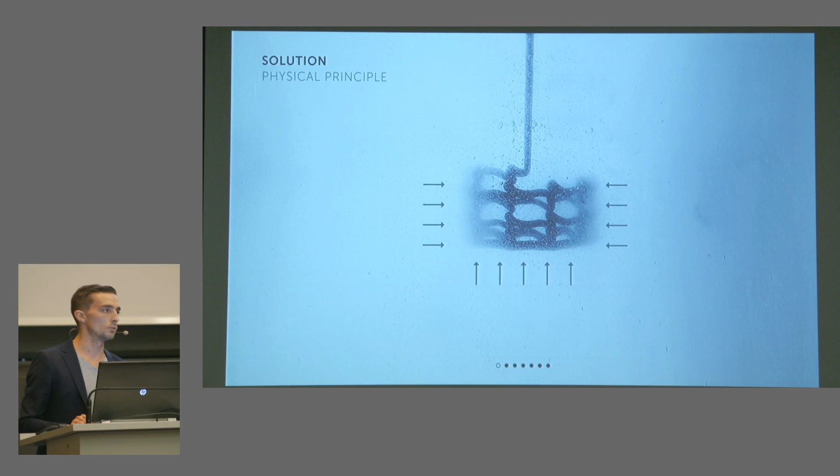Soliquid is a French startup founded in 2018, based in Paris, France. Both founders are architects, Jim Ronet and myself. What we are proposing is large-scale 3D printing in suspension for concrete and resin. The physical principle we use is the viscosity of the gel matrix, which keeps the material in place until its total solidification. Depending on the material, you need to wait longer or not. For resin, you need to wait 20 minutes to dry; for concrete, we wait 24 hours.

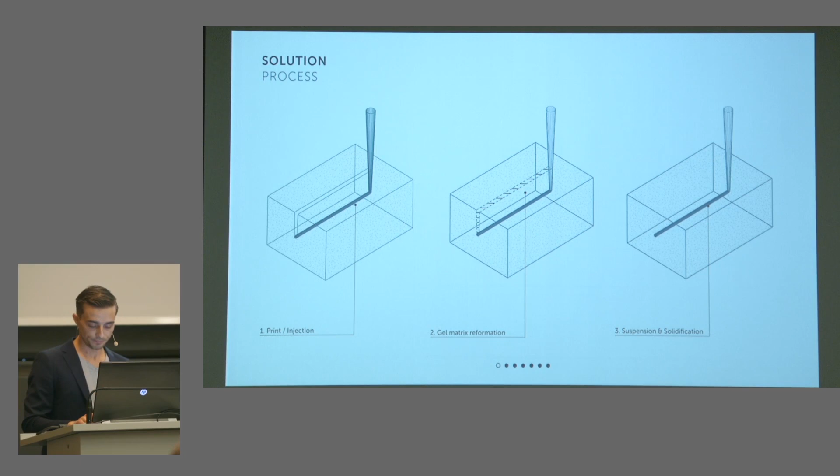So how it works: there is an extruder going through the gel. There is a gel reformation, and after extrusion it stays in place until solidification. This allows us to create very complex geometry because we are not using a layer-by-layer methodology. Also, we don't need any support, and we can reuse the gel for months, which allows us to save material because we only put material exactly where we need it.

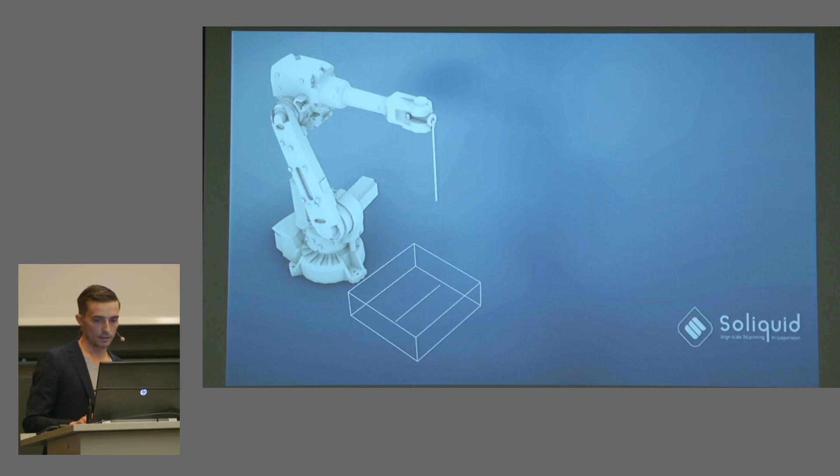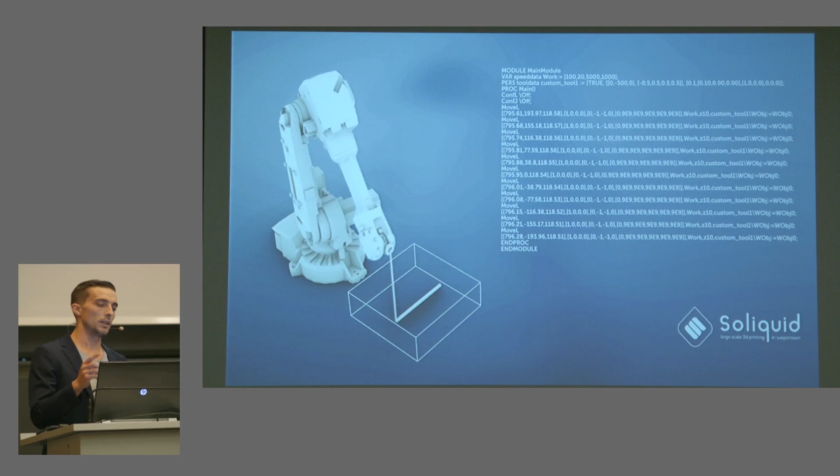So basically, this is how it works. We just draw a line in 3D space, divide this line by successive planes, translate it into a RAPID code, and then we can print it. This one is a simple line, and this is real time.

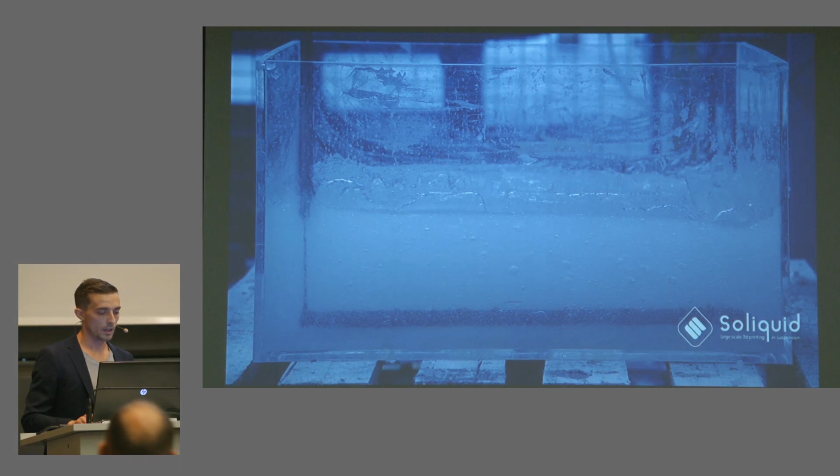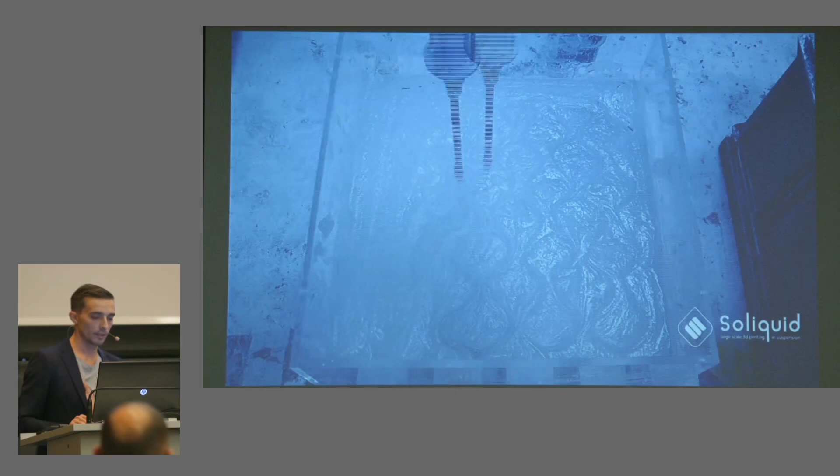After this proof of concept was done, we tried to print more complex geometry in the 3D space. Afterward, we just need to extract the pieces. At this time it was by hand, but now we are using a bigger tool.

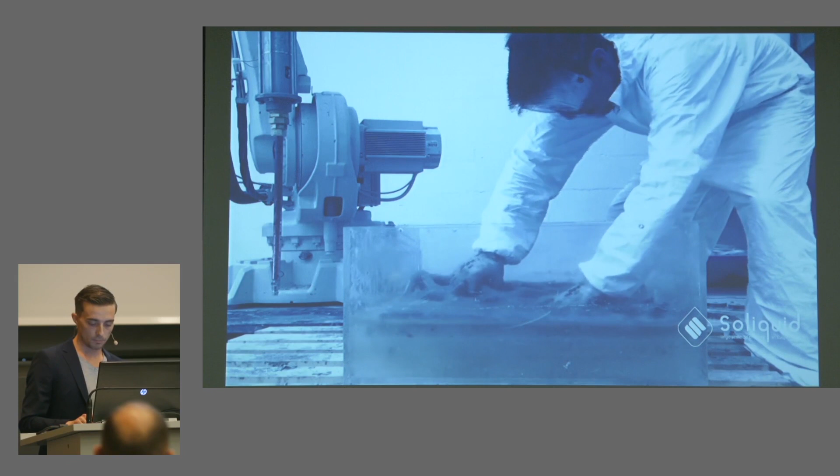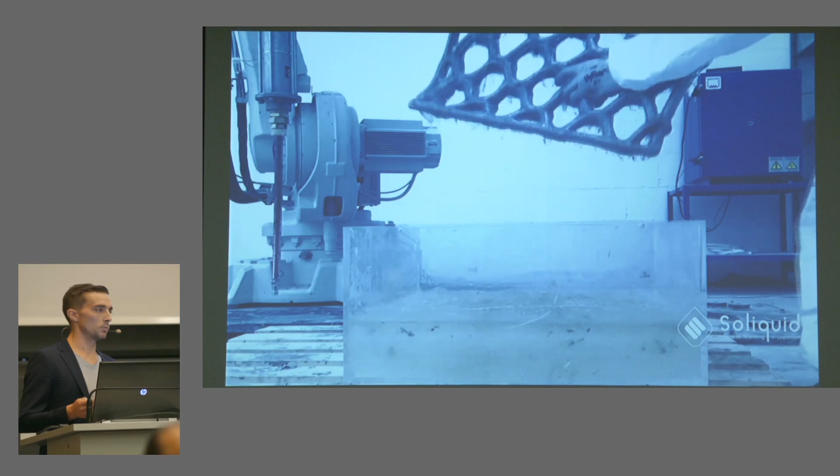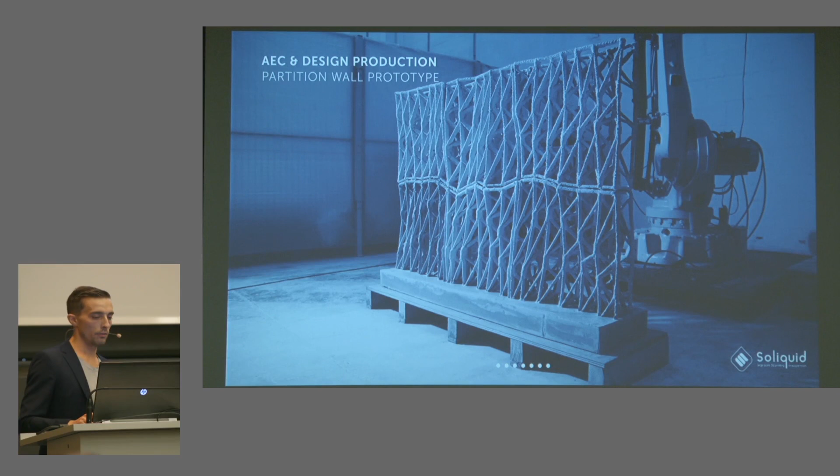So this was the end of the proof of concept. Because we were struggling to find the right gel with the right viscosity for the concrete, our first large-scale prototype was this wall composed of 6 modules. It's a very intricate geometry.

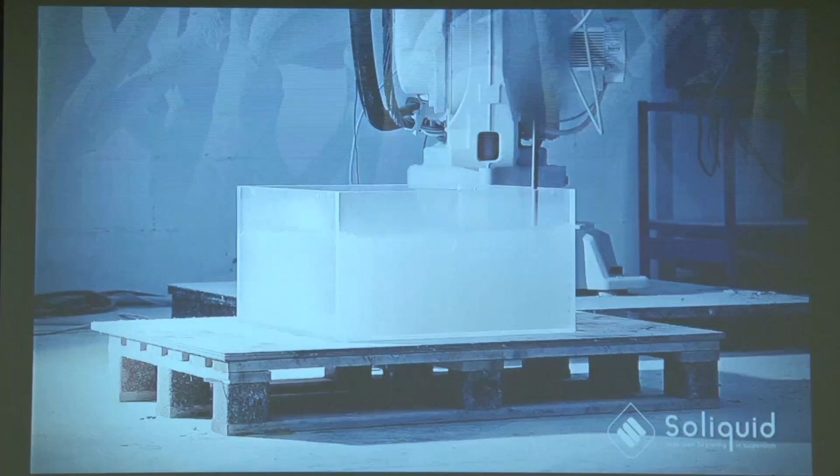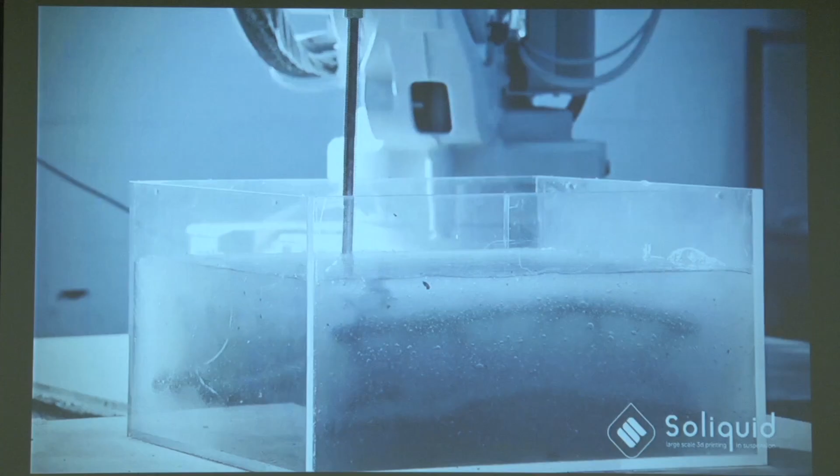This is a little video showing it while printing. As you see, the material keeps in place. This is real-time printing, and then you get your pieces.

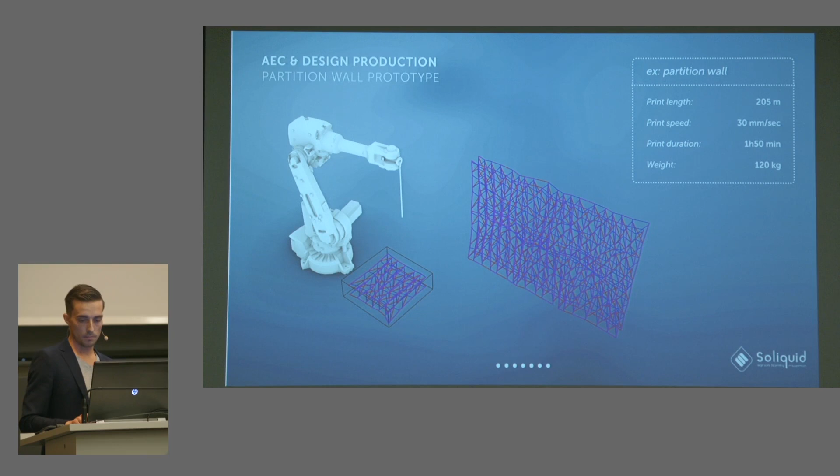This wall was 1.5 meters wide and 1 meter high. We printed all those modules flat in the tank of gel, and afterward we just assembled them together with sealing resin. The biggest problem with this wall was it was not solid at all and very fragile.

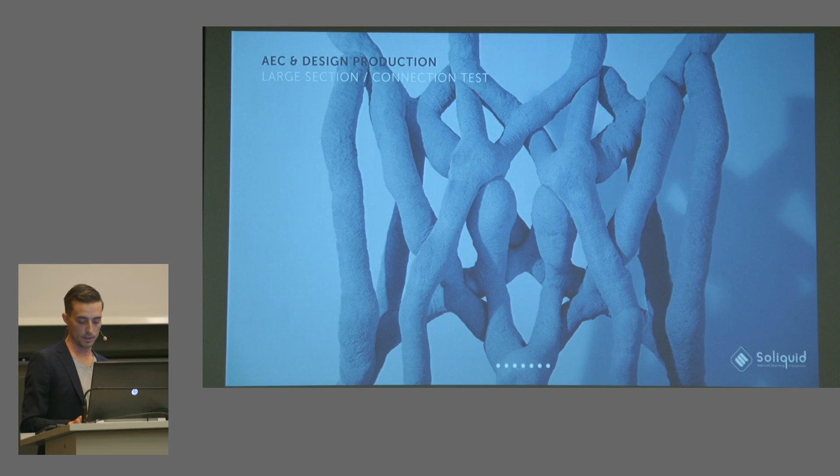That's why we tried to print a bigger section. For this prototype, it was a 5 centimeter section. We made this geometry to test all the types of joints and how they could be connected, and also to see how close the 3D print is to the finished model.

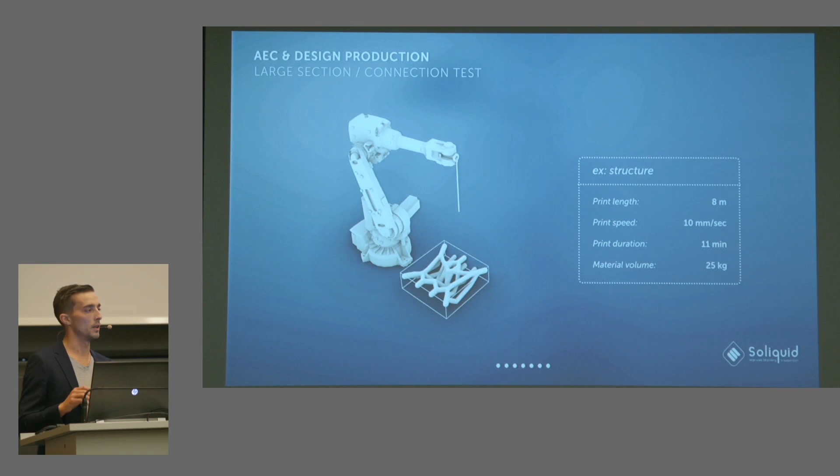This one also we printed flat, so a little bit of data: it was a printing length of 8 meters, it took 11 minutes to print, and we left it for 12 hours inside the gel before extracting it.

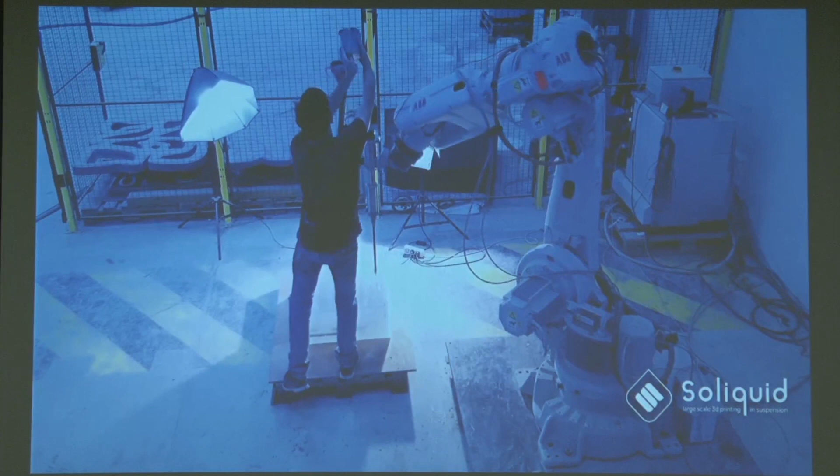The biggest problem is that if we would like to make bigger structures, we get a problem with how we feed the extruder. This one was a small one, so we ended up with this setup.

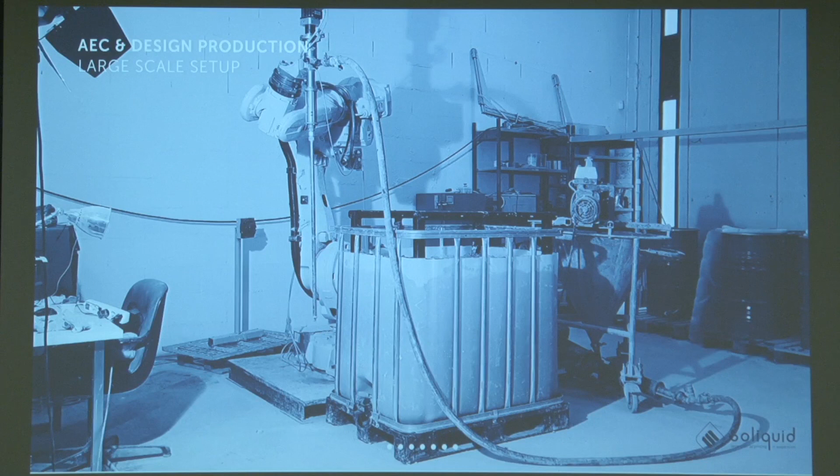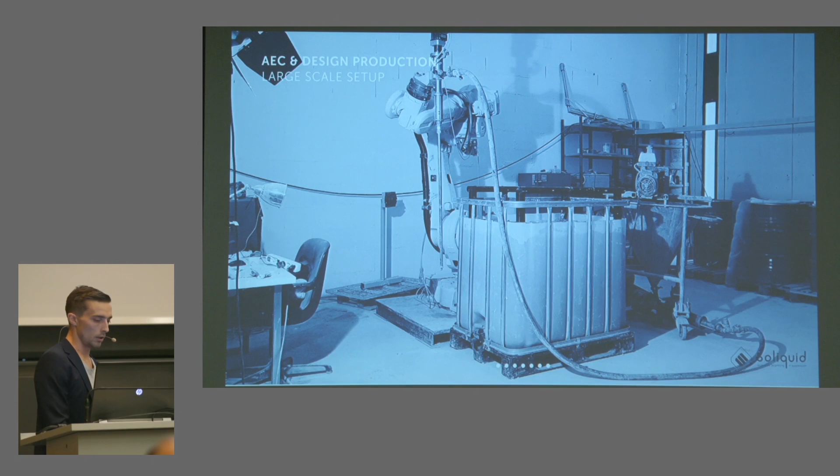Now we are printing inside a 1,000 liter gel tank. There is an extractor at the bottom of the tank that goes down to up to extract the pieces, and a bigger pump to be able to extrude a few hundred kilos of concrete.

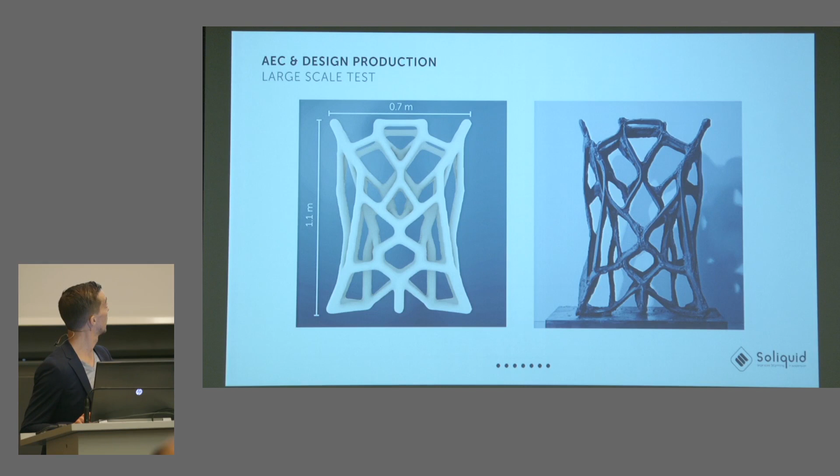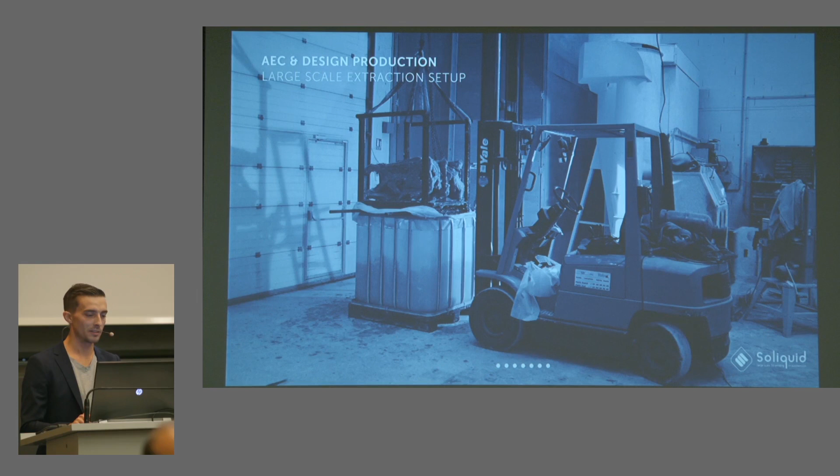This was our first large-scale prototype. It was 1.1 meters high and 70 centimeters wide. It took us 22 minutes to print, and the weight was 80 kilos. We had to extract it from the gel tank with a bigger tool because it was too heavy to do by hand.

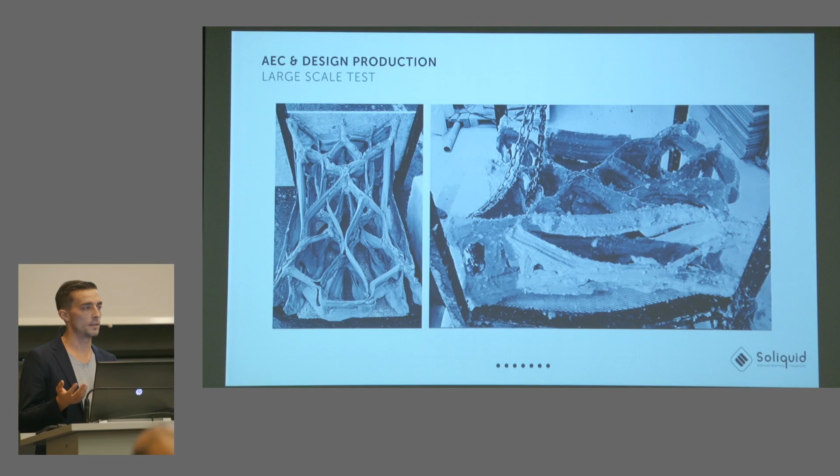Unfortunately, the first test was not very conclusive because the finish was not good. Because, of course, when we scale it up, we just face more problems like gel pressure and difference of viscosity between the concrete and the gel, because we had to make a very viscous gel to hold 80 kilograms of concrete.

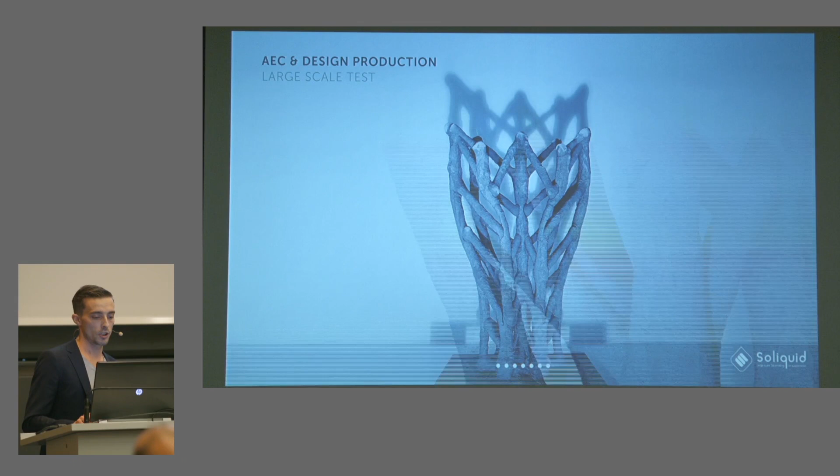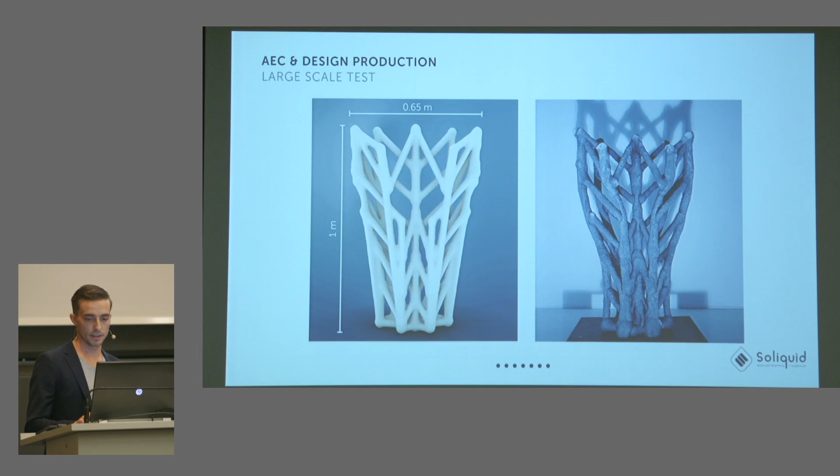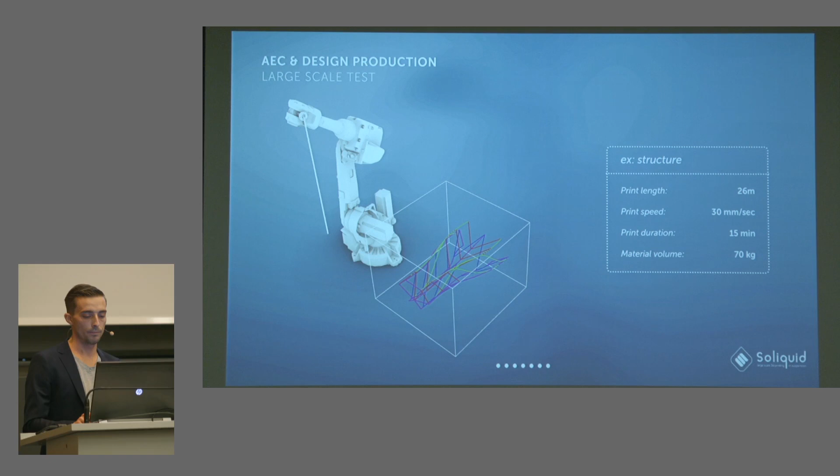So we worked a little bit and ended up with this prototype, where the sections were much cleaner, and the finish was closer to what we actually designed. This one also was printed flat. It took us 15 minutes to print, and the weight was 70 kilos.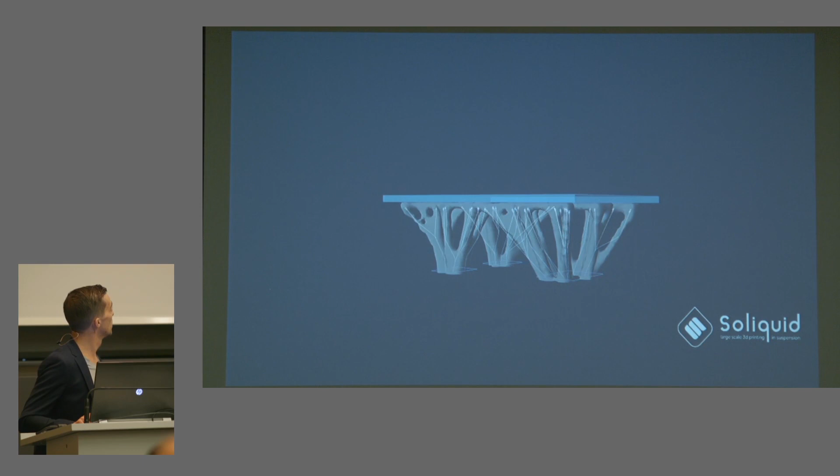After we made this project, we tried to link topology optimization to it. We developed a multi-agent algorithm able to create the path for the robots, and then the robot just follows this path until it's making the full structure.

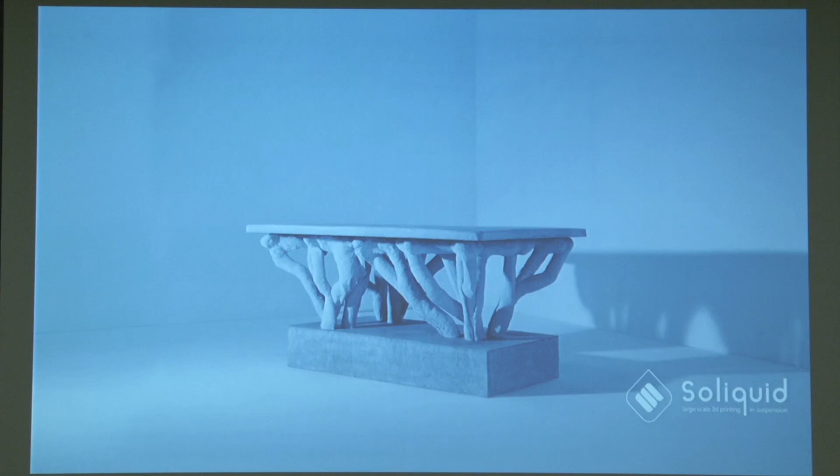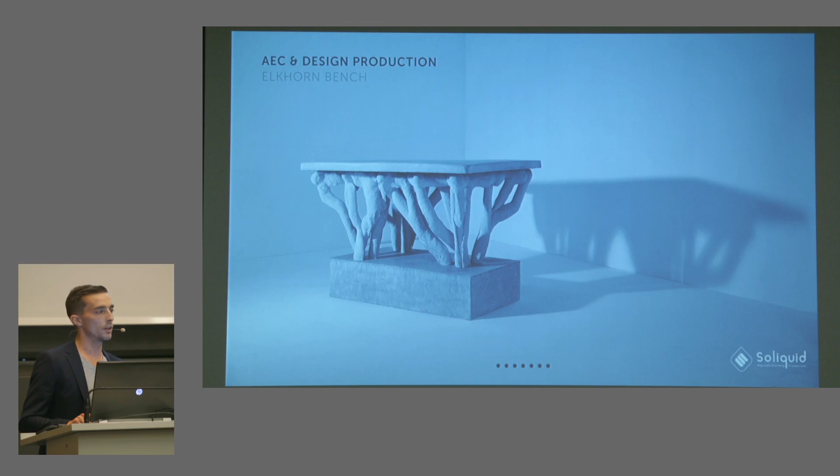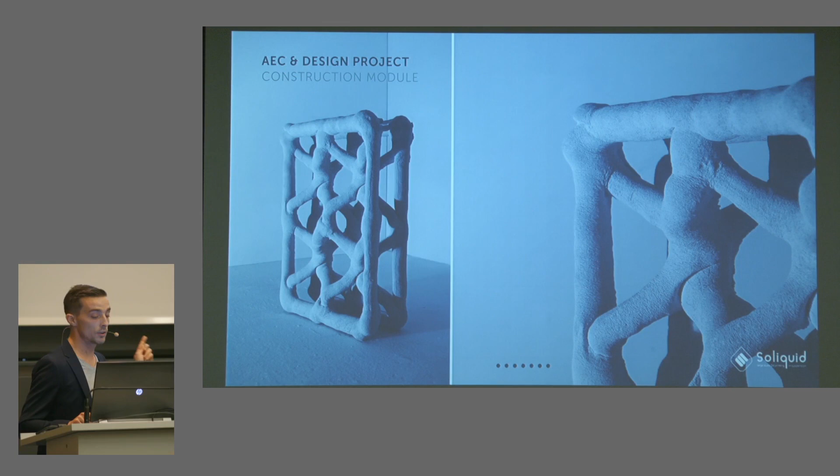For example, the plate on the top of these structures was 50 kilos, and we just sat on it, and it didn't move at all, so it's pretty solid. And the last thing we made was a quality finish prototype. This is now the best finishing we've succeeded to get.

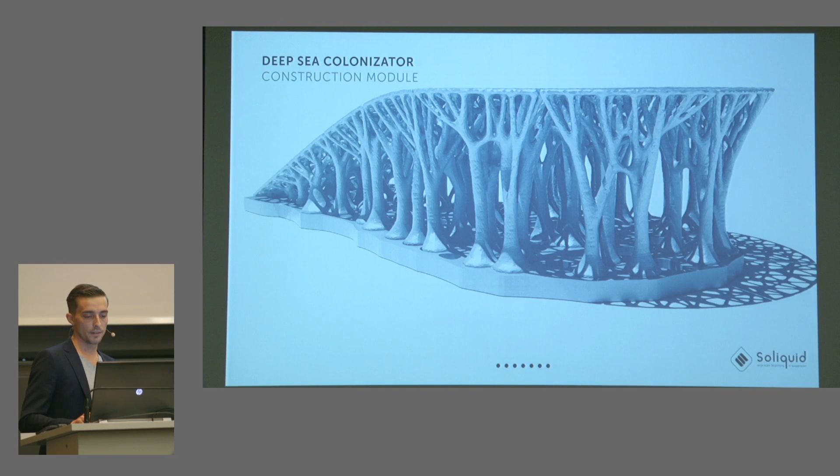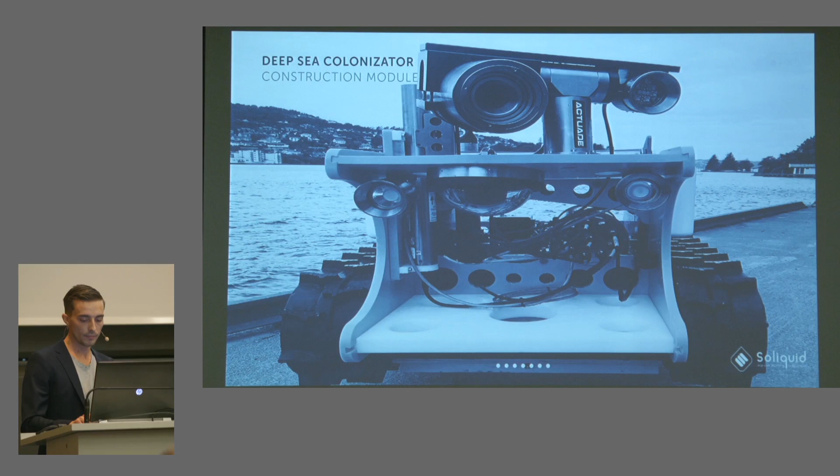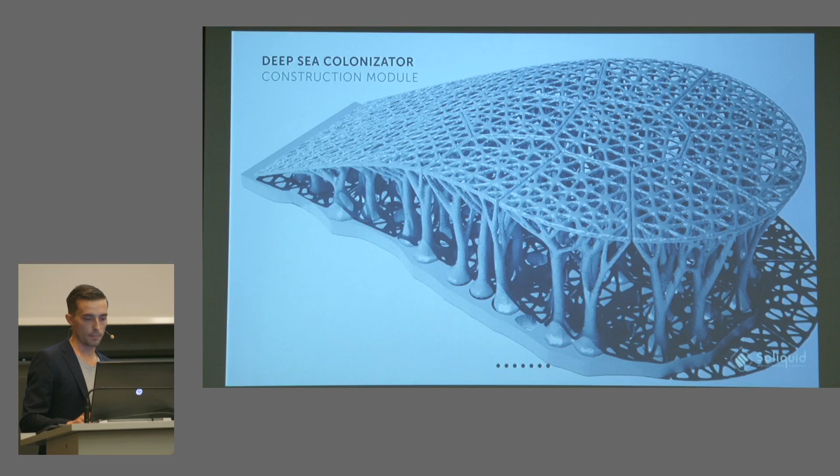There will be robots on top of it, analyzing the development of the ecosystem in the sea. On top is the platform where the robot will move, and there are some walls to let the robot, with a camera, see through the structure. The construction method will be...

The artificial reef is composed of 15 modules, and each module will be printed individually, and after that we will assemble them on site.

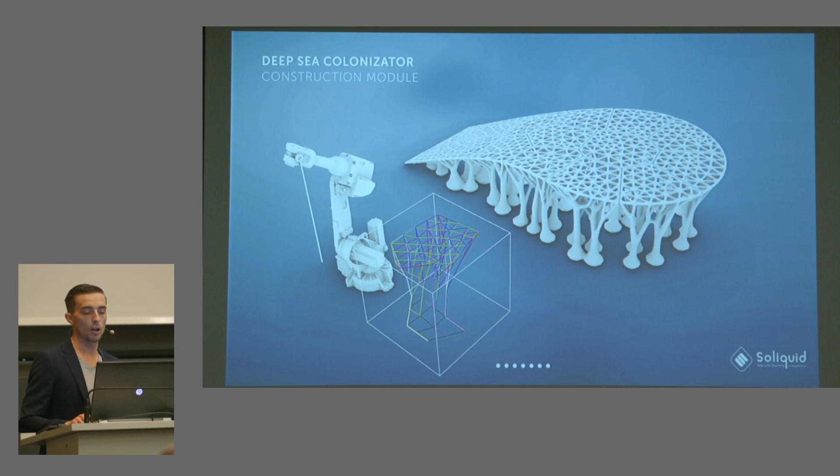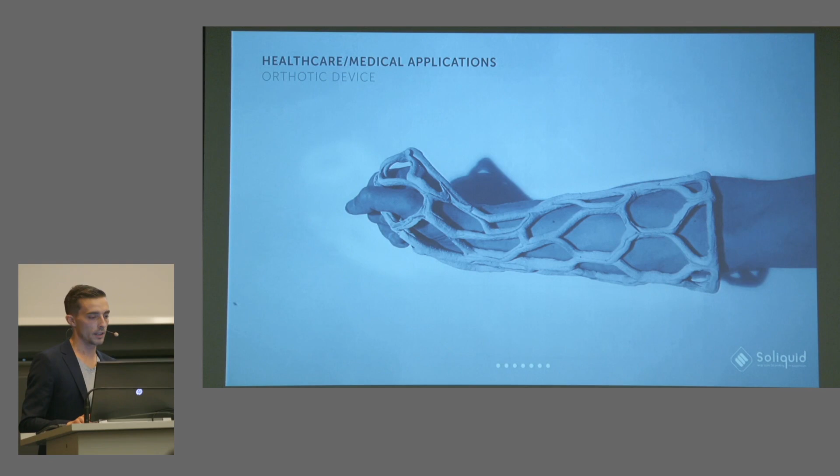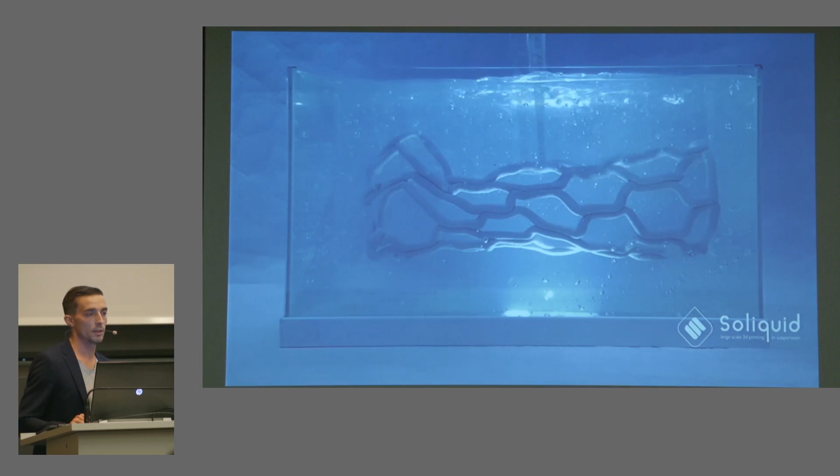Another project we are working on now is not related too much to construction, but it's a big market too: healthcare and medical applications. Basically, we are scanning an arm, and after that we are able to create this orthotic device very quickly. For example, it took 3 minutes to print this device, and afterward we just wait 20 minutes inside the gel to be able to take it off.